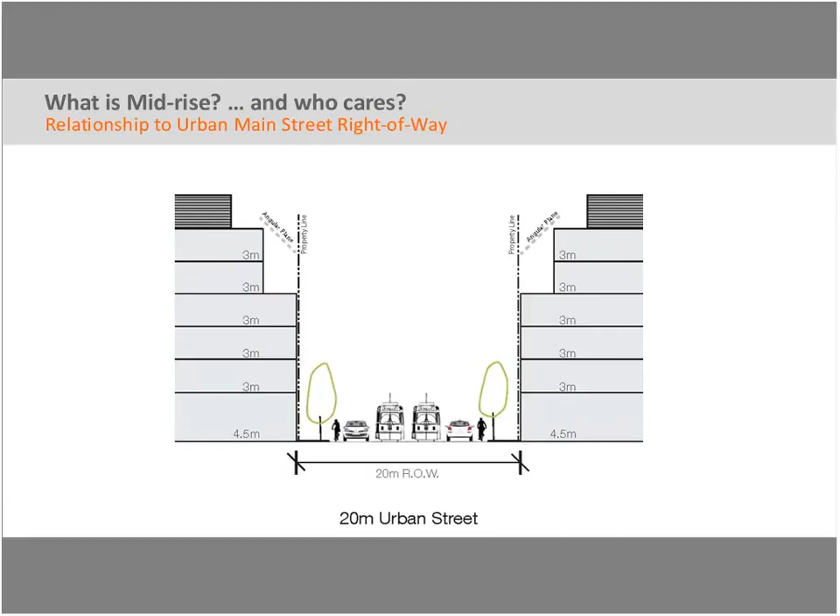So creating complete communities with Midrise is not just possible in established urban centers, but in all places where people currently live, work, and play. And also where people learn, because campuses are also very much a subject for this type of development.

So our portfolio is full of great Midrise examples. Over the span of 30 years, we've done many. Sometimes these are infill projects. So with the experience of many completed Midrise buildings under our belt, we have contributed to the guidelines that govern Midrise development in Toronto today. Many municipalities have adopted similar guidelines to encourage and control Midrise development.

I should point out that these are not rules and regulations. They are guidelines, because at the end of the day, there's opportunities in different locations to do something a little bit different. Midrise buildings are important buildings for the city and placemaking. I should point out as well that mid-rise buildings are more complex than low-rise buildings, and mid-rise buildings do not benefit from the economies associated with the repetition of high-rise floor plates. A dedicated team is essential, and by creating feasibility studies as well as prototyping solutions, and then focusing on effective and efficient, speedy delivery is the key to success.

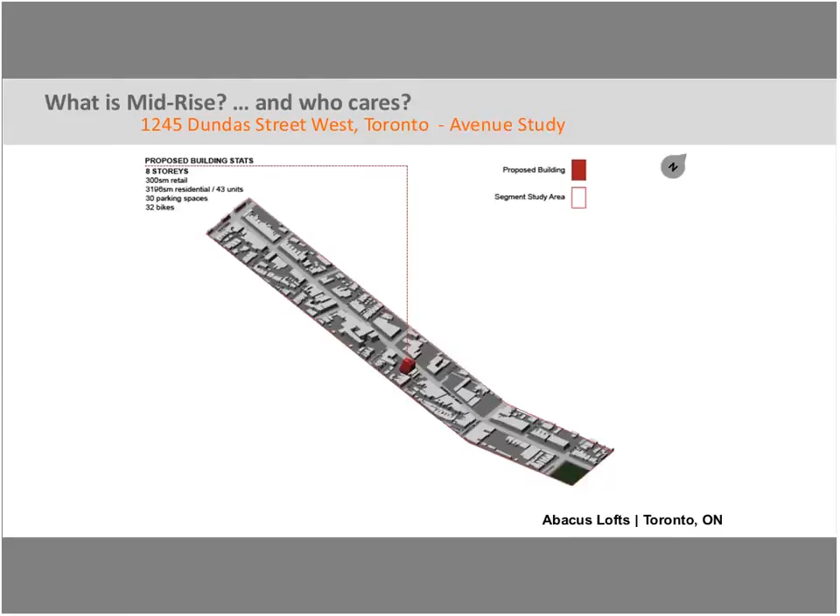So context matters, and we look at planning documents and have interaction with the public on what is appropriate and complementary. So the relationship to the street and the transition to an established residential neighborhood is important and becomes that balancing act during the design process.

But all our hard work results in something quite remarkable. Midrise does not just change a neighborhood, it enhances a neighborhood. And ordinary places become extraordinary.

So I was struggling with the fact of calling this perhaps tall tales from a wood fanatic, because I'm interested in getting wood construction taller and bigger. I've been advocating in recent years that this becomes part of the Midrise conversation as well.

Wood is an excellent construction material to be utilized because it's a renewable resource, and we have the best well-managed forest industry in the world. It is said that one mid-rise building can be grown every 7 minutes, which is quite remarkable. And the material is very affordable since we're surrounded by it.

So I'm a fanatic about wood construction because I've seen what it can do in British Columbia. In 2009, BC changed the building code to allow 6-story wood buildings. And Ontario has followed suit because it just makes sense.

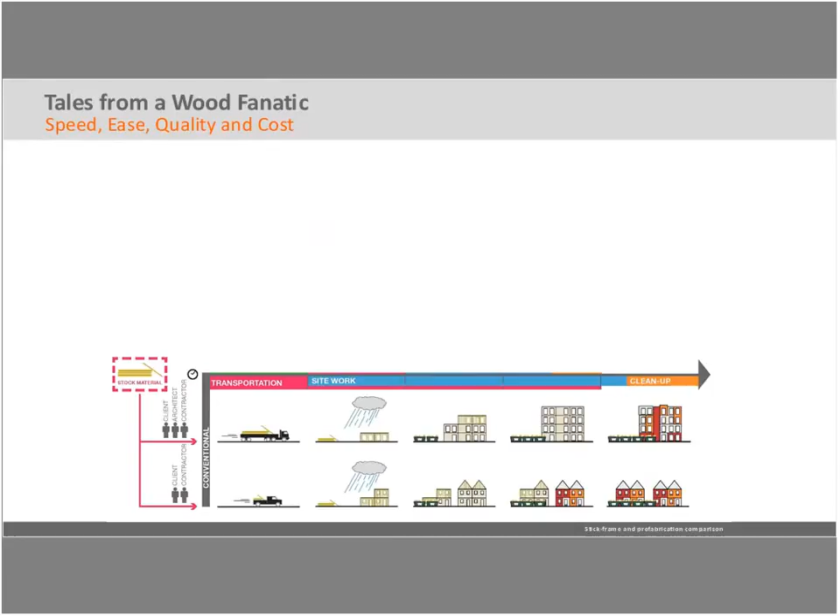Single-family homes, stacked townhouses, have a larger footprint than 4-story apartment buildings. Adding more people at the front, collaborating on designing and engineering more sophisticated buildings allows for more quality control construction and reduced timeline, and also reduced waste generation during construction.

So adding 2 extra stories allows for a more appropriate relationship of these buildings to the public realm, the street that they're on, basically, and provide the opportunity for mixed use and a greater diversity of dwelling units as people occupy them.

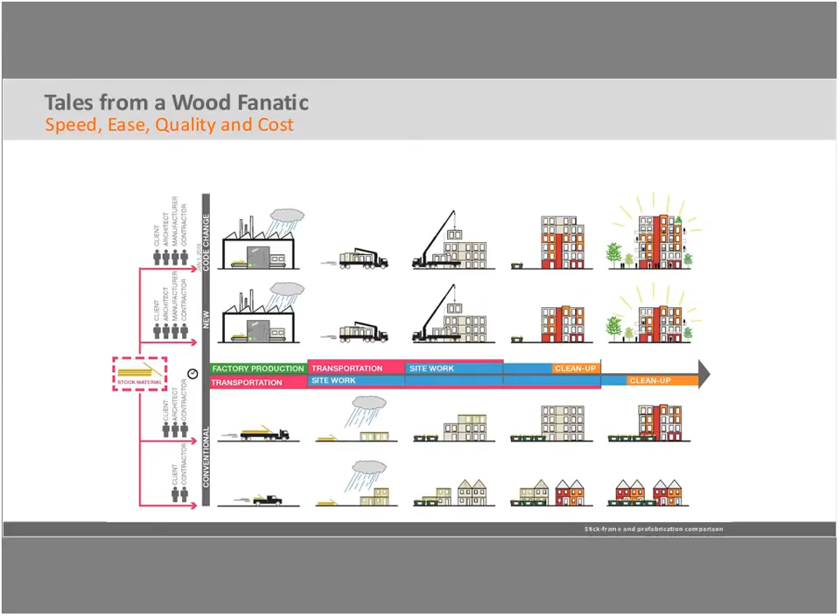So Midrise is for everyone. All architects, builders, and developers can get into making Midrise a reality.

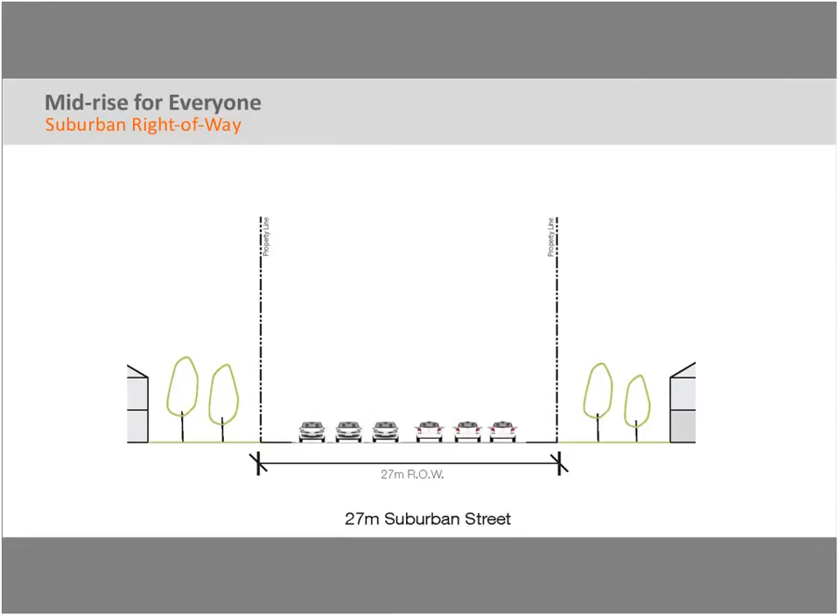So many of these growth centers, we have car-oriented development. The suburban streets and road systems are public right-of-ways with large setbacks and landscape buffers. These suburban roads are wide and accommodate cars to take us where we need to go. But not designed for the car alone.

Just imagine if we build mid-rise buildings along these public right-of-ways, all of a sudden this public space transforms. Multiple modes of transportation can be accommodated, the traffic slows down, and it becomes a destination rather than a thoroughfare. Midrise, in other words, supports live, work, and play in currently very transient places.

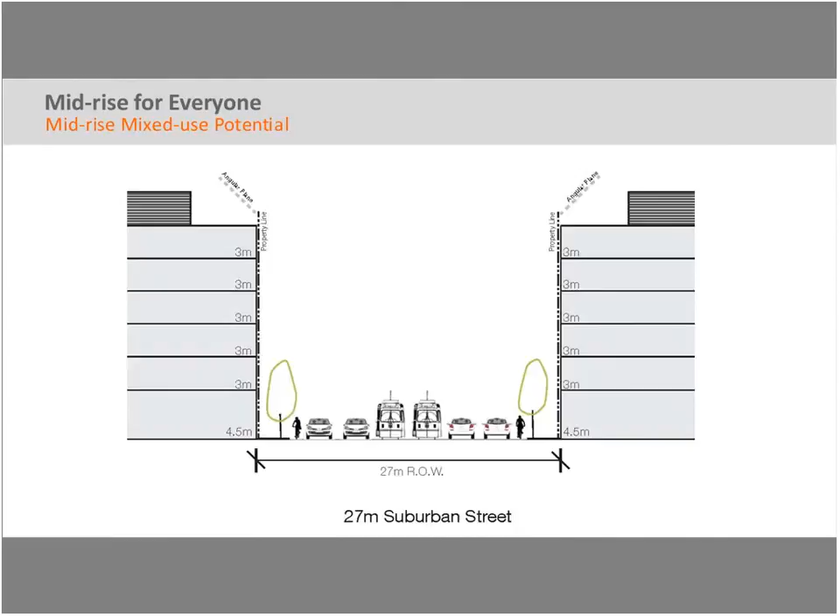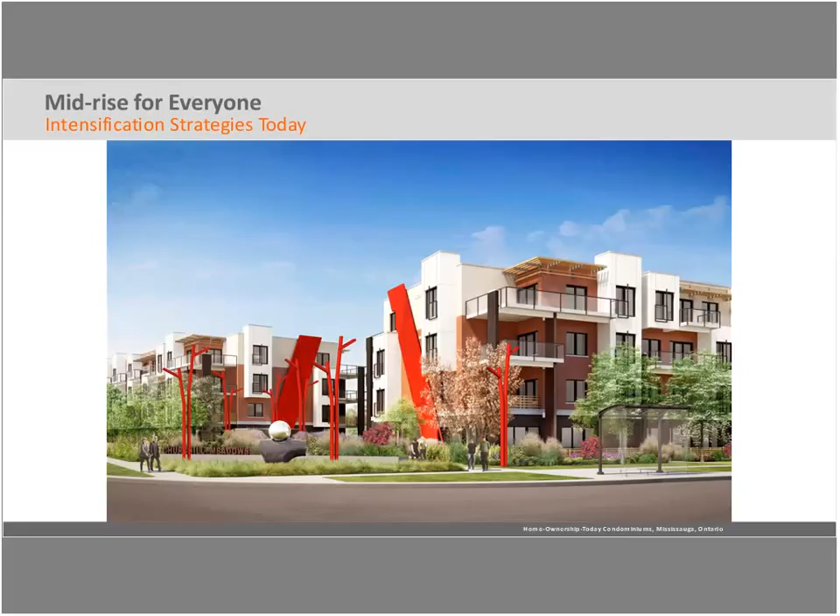We can transform suburban areas and make them more walkable. This project has been recently realized in Mississauga. Home-Ownership-Today Condominiums is the name of the project. Should and could have been 6 stories tall, which would have been quite appropriate in this particular location.

We're happy how the project turned out. Market acceptance has given us confidence that people are looking for diversity and are okay to live in wood frame buildings. In fact, a lot of people don't care what it's built out of because they know that we have a very good code. The project is providing more variety and more dwelling units that are accessible and affordable.

So as I complete the presentation, the most important thing for Midrise is the consideration of context. Every site is unique and every context is different. Building code change and intensification strategies are something to be enthusiastic about.

It is exciting that Ontario has the same ability to now develop mixed-use development that supports pedestrian-friendly and transit-oriented neighborhoods for people that really are efficient and effective to build, and which British Columbia actually has been doing for some time. And this is a good example of it.

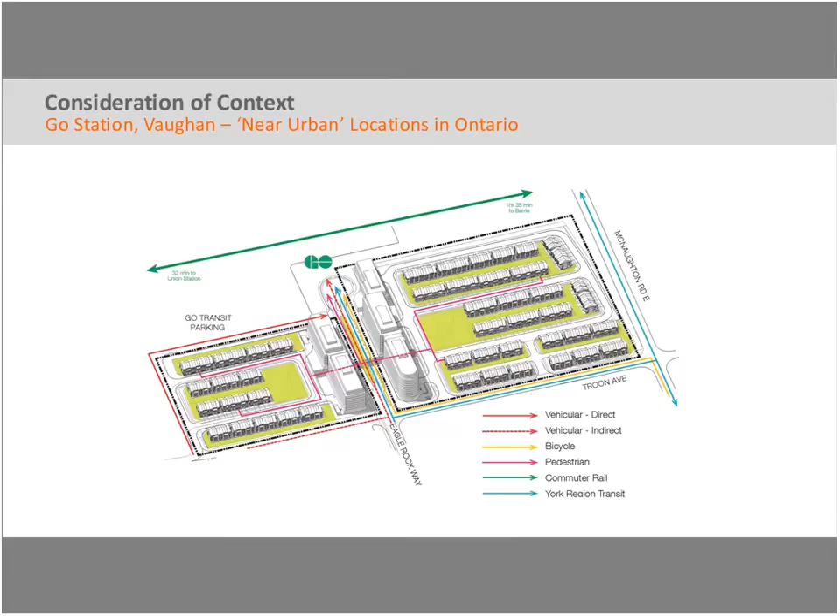Connecting to transit hubs, as pictured here, also builds that sense of community and connects each community and neighborhood further. We are currently working on a mid-rise Main Street type of development at the village of Maple, the GO station in Vaughan.

We envision more and more of these complete mid-rise communities emerging in the growth centers identified within Ontario's Places to Grow Act. We are excited and look forward to designing buildings to satisfy that potential and together create a sense of place.

Well, thank you very much, Marco. That was very good. Thank you, Marco.

What we're going to do now is ask Jonathan Critchley, the GIS specialist at the Canadian Urban Institute, to give a demonstration of the interactive map that we're launching today in the pilot phase of this Midrise database.

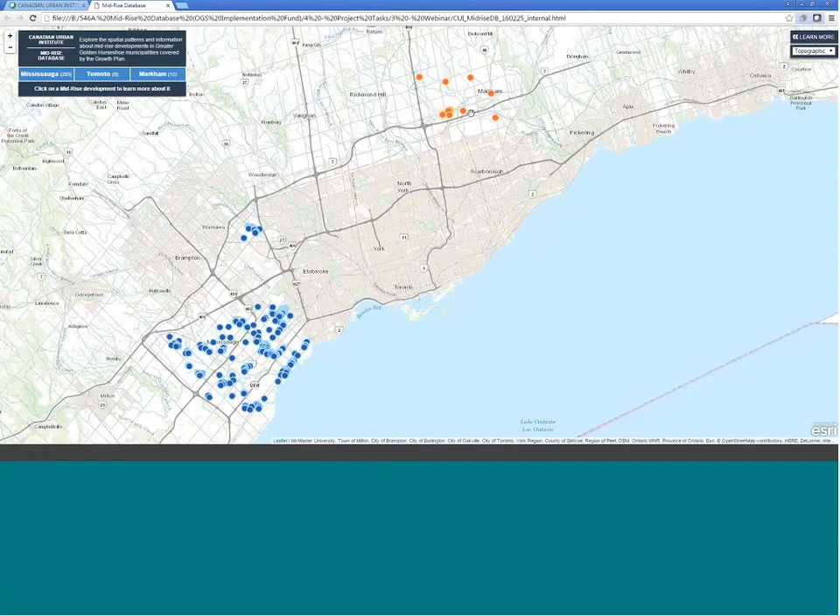As a demonstration, the initial page loads with points in the 2 municipalities we received data for, Mississauga and Markham. You can zoom in like any modern web mapping software and click on a point. The information collected for that development is displayed on the left-hand side of the screen, as you'll see.

Only information for attributes that we received data from the municipalities are included here. We weren't able to achieve collection of all the attributes we were looking for, but this is the best that was available within the timeline of this pilot phase.

As there are a lot of attributes, we decided on this design of the web map to easily display information on the left-hand side. Some things you'll see marked NA, which simply means the information was not available at the time or within the timeline of this pilot phase. You can easily jump between Mississauga and Markham.

If you zoom in to the mid-rise development, you have an option between 2 base layers: a topographic base layer and aerial imagery. These 2 options provide a way of viewing the neighborhood context around the mid-rise developments.